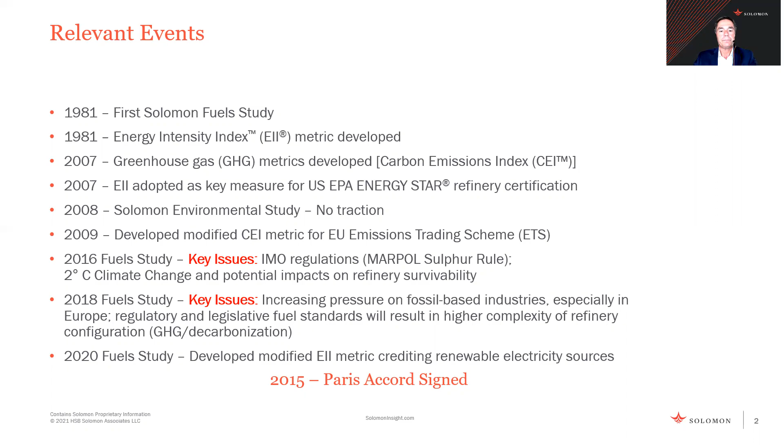Solomon's Carbon Emissions Index was developed using our industry standard Energy Intensity Index methodology, modified for carbon emissions, of course. CEI is scientifically and statistically sound. It is quite complex as a result. The CEI derivatives were developed by Solomon to simplify the metric for use in various regulatory and voluntary reporting situations, beginning in the EU. These CEI derivatives provide the transparency necessary to ensure consistency and a means of verification in these different reporting scenarios.

Since then, versions of CEI have been developed by Solomon that are now used in several countries, including the US, Canada, Korea, and India.

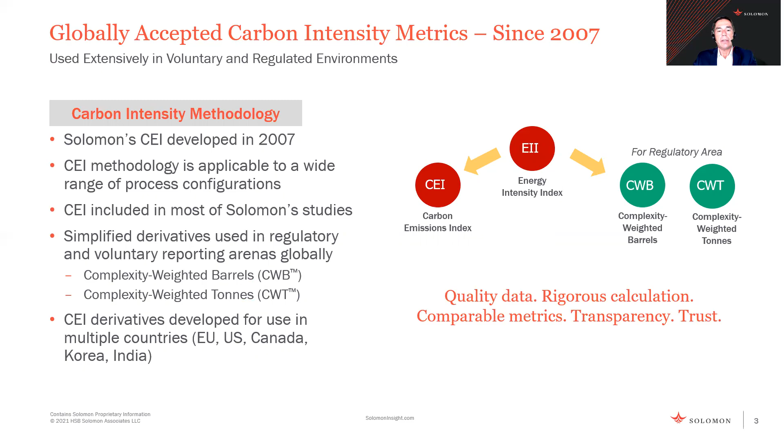We all know too well that our clients feel the pressure of the sustainability movement, change that many say is unprecedented in the history of the energy industry. Net zero GHG emissions by 2050 goal setting will have a wide range of impacts on refinery survivability. We're already seeing evidence of that today.

Technology developments, some more promising than others, could provide an economically viable way forward for many refineries. Commodity businesses and trade-exposed industries will need to be creative to continue to attract investor support to meet the carbon emissions reduction targets.

Solomon has the data to show how our clients in more than 70 countries have reacted to other large change events over the years. We know the characteristics and behaviors of those that thrive with change, and we also see the characteristics and behaviors of those that do not adapt and are divested or close. In short, there are winners and there are losers.

The winners never lose sight of the fundamentals that lie underneath what I would call the fancy graphics and digital bling. Economic thinking, continuous improvement, and a relentless focus on the fundamentals are crucial.

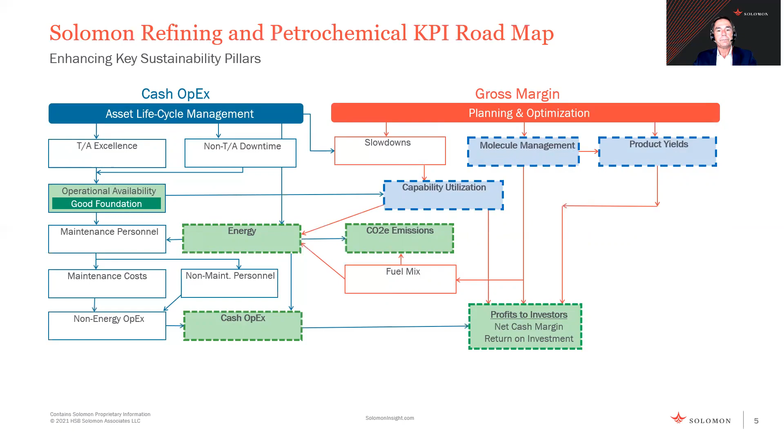When Solomon analyzes net cash margin in refineries, we see that transportation fuels are the primary product from refineries worldwide, even those that tout being crude to chemicals facilities. Profitable refiners strive to upgrade the raw material to refined products that have a value greater than that of the raw material cost. The petrochemical products and the transportation fuel products will have typically a value greater than the raw material cost.

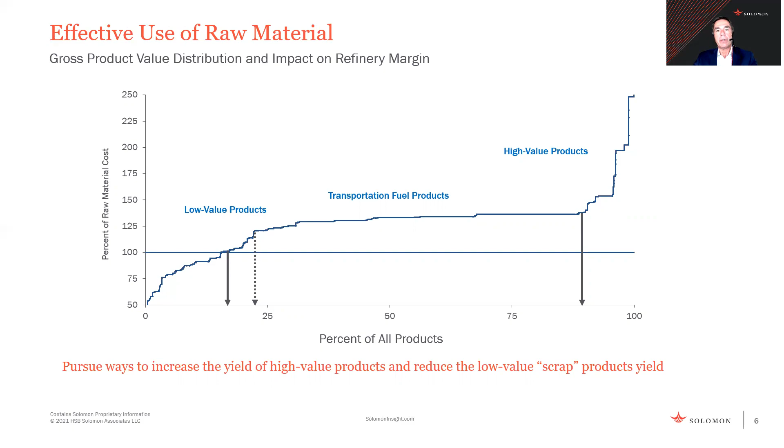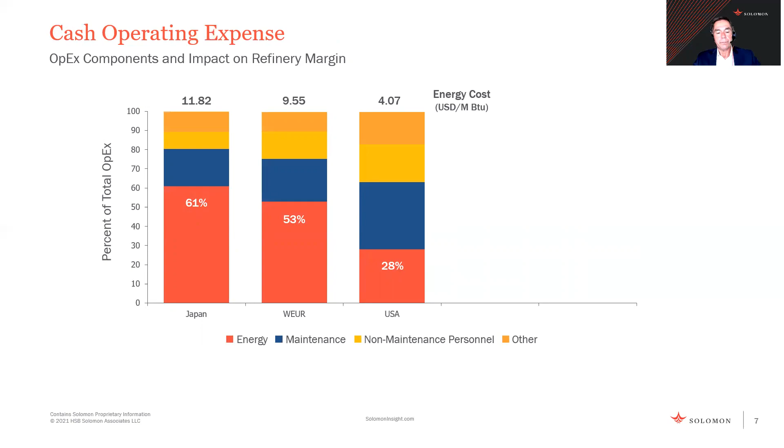For instance, the estimated carbon reduction potential for US and Canadian refineries is 49 million metric tons per year if this gap is closed. Olefin plant reductions would add another 12 million metric tons per year reduction. And on a global basis, the estimated carbon emissions reduction potential related to closing these EII gaps in these two sectors is over 200 million metric tons per year. To put this in perspective, the US EPA website claims that 1 million tons of CO2 is equivalent to the carbon sequestered by 1.3 million acres of US forests in 1 year. Closing the energy efficiency gap in US refineries and olefin plants is equivalent to 80 million acres of US forests, or about twice the land area of Oklahoma.

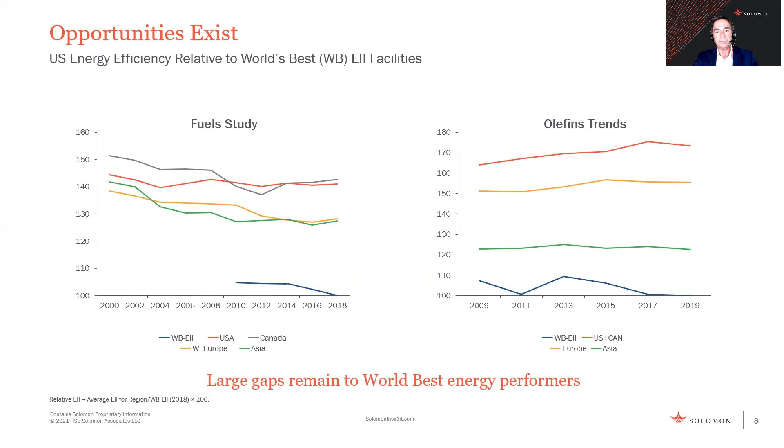The best operators are pulling two levers to become more energy efficient and in turn reduce carbon emissions. These are energy consumption and fuel mix. Note that the energy mix determines the carbon emissions factors utilized in the calculation of Solomon's CEI metric for each unique operating facility.

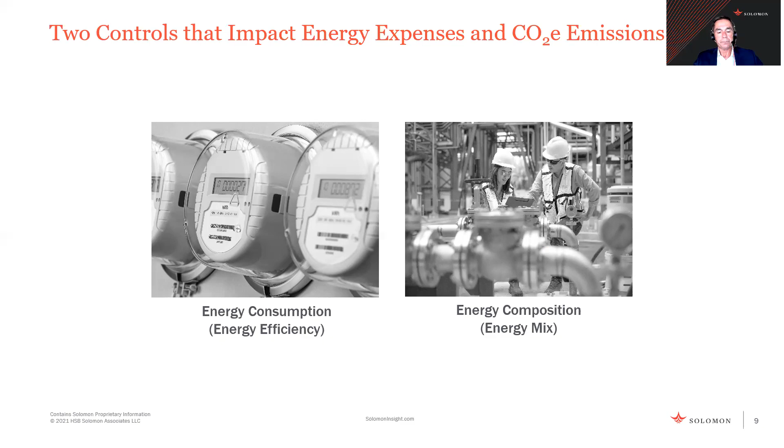This supports that we need to think beyond simple energy savings economics for energy projects. We need to do something different. We need to change the way we think about these projects. And we need to start thinking about energy when we plan our maintenance work strategy. We need to look at the whole picture. The fuel, steam, and power systems need to be considered holistically with an end state in mind. For instance, replacing one steam turbine doesn't save enough water to eliminate an entire cooling tower, but replacing several over time just might.

It is also important to think about overall site economics. For instance, if water is scarce or expensive, energy project economics may become even more favorable. The key point here is that energy efficiency improvements can reduce OpEx well beyond the fuel savings alone. So you have to ask yourself, what would your total savings be to improve energy efficiency to world's best levels?

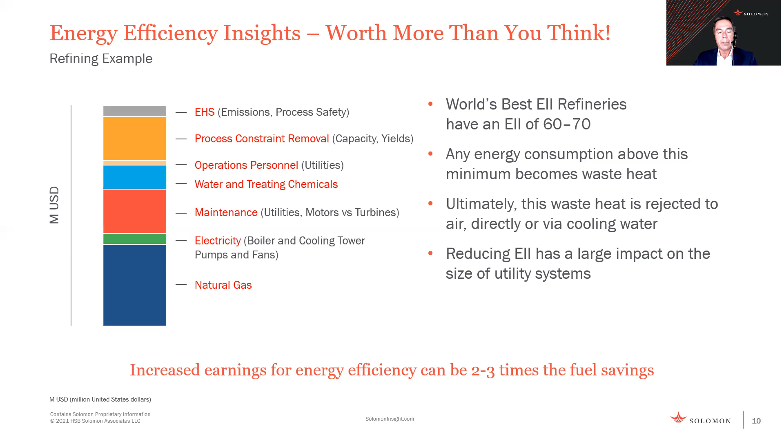And consider all economic drivers in your analysis. Non-traditional factors have value today in this equation. Carbon emissions, ESG factors, and public sentiment all have real or perceived value. The total opportunity value is much, much larger than the sum of its parts. So moving on to energy mix.

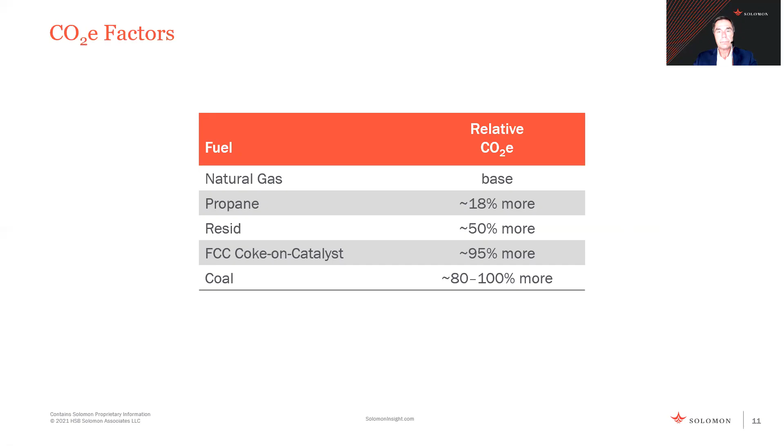So natural gas is often referred to as a bridge fuel to help companies meet their carbon emissions reduction targets. This table is showing the carbon emissions factors for several fuels relative to that of natural gas. CO2 emissions from burning natural gas is approximately half the emissions associated with burning coal for the equivalent amounts of energy produced. So how has the industry leveraged the abundance of natural gas in the United States?

And proactive operators also continue to look ahead and today explore more and more new technologies. Electrification and electrolytic hydrogen are expected to economically compete with alternatives like natural gas. Not immediately, of course, but possibly within the next 10 years. Carbon capture, utilization and storage pilot projects, CCUS, are underway in several locations. Significant technical and cost uncertainties still exist for CCUS in refinery applications. And certainly, CCUS facilities will add significantly to overall refinery CapEx and OpEx in the future.

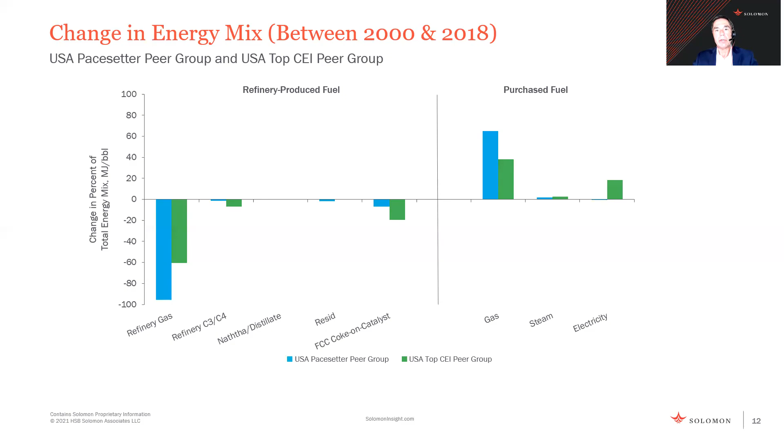Investors today want companies to provide more than good financial returns. They want that, plus they also want lower environmental impacts. The investment community has been very vocal about this, and investors like BlackRock are demanding its portfolio companies adopt long-term climate action plans. Naturally, investors and stakeholders alike want transparency in reporting of sustainability measures from companies. But there is a growing belief that sustainability reporting is unreliable, inconsistent, and does not reflect the factors that really matter to the overall economic performance of the company.

In many cases, the data are selective and the quality is poor. This can put companies who are more diligent in their reporting actually at a disadvantage when being compared with others who are not as diligent or as complete. And beyond that, the use of various voluntary standards has resulted in data and information that is neither comprehensive nor comparable. The fill-in-the-blanks methodologies are simply inconsistent. Scope 1, 2, and 3 reporting is not apples to apples because not all methods use full well-to-market life cycle assessments. Consequently, for all these reasons, the investment community is pushing for a single reporting framework.